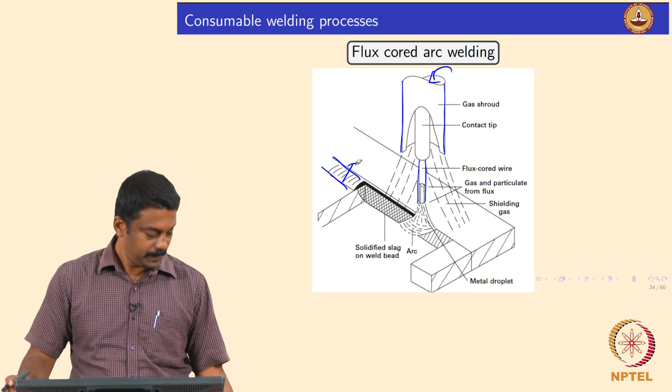So, this is the cross section of the electrode which you saw in last class as well. So, you have an outer sheath and then the flux is inside. Now it is almost compacted.

So, you can have a look at it. This is a 2.4 mm diameter FCAW, it will not come out even if you tap it, because it is already compacted with the binder.

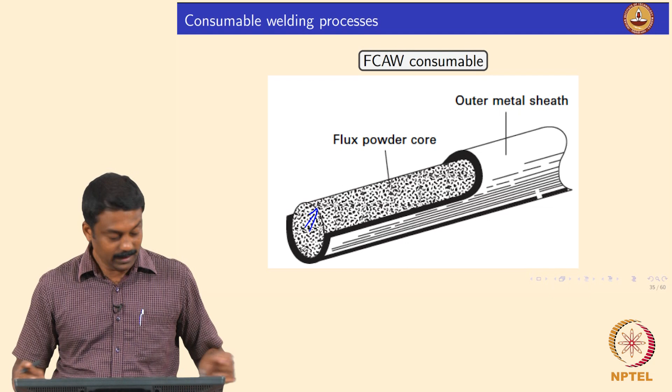So, all the compounds or the flux are added inside, and then the electrode is made from the flat strip, and then you add the flux powder, and then you close it. In most cases it is not really welded, it is just simple folding, right.

So, they just fold it and then they close the seam, and you can generate as much length as possible, and then generally we make it similar to what GMAW electrode filler. So, we will have spools of electrodes made with varying weights and lengths, and that can be fed into the power source. Yes, it is clear.

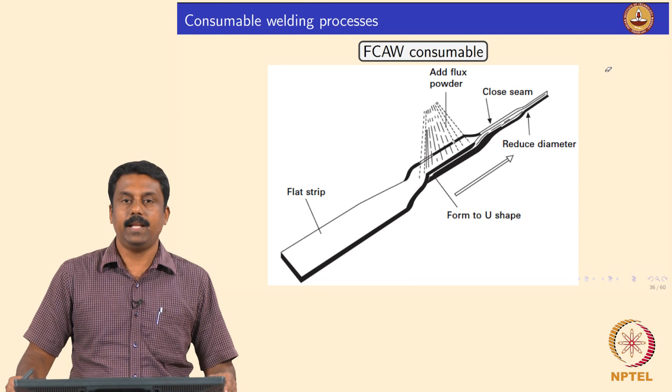Good. So, a typical cross section looks like this, so you can make it as a seamless tube, or you also have a butt seam, and this is the electrode I gave you, it is a butt seamed electrode, where you have a simple joint. Or you can also have a varying joggle seam on the complex section, so in this case you can also improve or increase the amount of alloy molten. In this case the cross section, or the length of the metal, is much lower than when you have such a geometry.

So, if you want to increase the liquid metal droplet, the contribution from the actual metal, you can also change the sheet geometry in such a way that in this case you melt more metal, and then you have a little amount of flux surrounding the metal sheet.

So, for these kinds of electrodes, the amount of flux which is there is not sufficient to produce enough shielding, because here the metal volume is much higher than the flux volume. So, such a geometry, complex section geometry, is used in conjunction with the shielding gas.

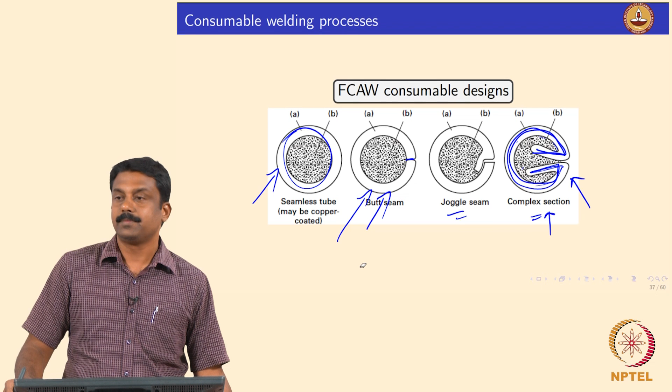So, the melting rate. In GMAW, what is melting rate? In GMAW, the melting rate of the consumable is alpha times I, beta L I square by A.

What is L here? Stick out length, exactly. So you have an electrode tube, contact tube, and then the electrode coming in forms an arc, isn't it? This is stick out length L. So this distance, what is this distance? This is contact tip, and this is workpiece, isn't it?

Then what is this distance? This is contact tip to workpiece distance. Okay, it is very simple. So CTWD, that is what we define all the time. CTWD minus arc length is your stick out length. So CTWD defines the distance between the contact tip to the workpiece, and that is a very important parameter, because that would determine the stick out length and the arc length.

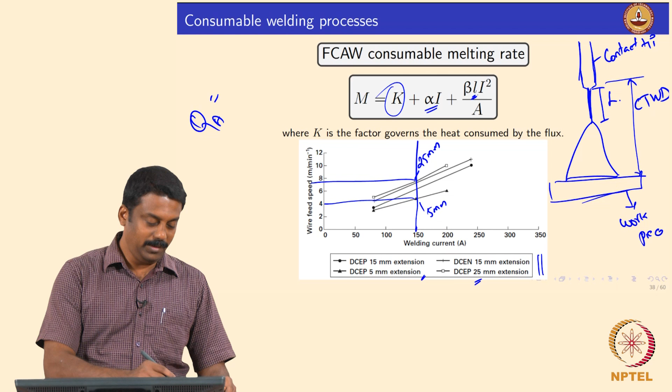If the current is the same, your question is why does melting rate increase? Look at this equation. If stick-out length changes, melting rate increases, because the more the length, the more Joule heating. So you looked at Joule heating, right? What is the Joule heating formula? I square R, that is rho L by pi R square, I square. That is how we derive the melting rate equation by heat balance, isn't it?

So what is L here? L is this stick out length. So more the stick out length, more Joule heating, then more heat is there for melting, right. So it is again the heat balance what we derived.

So by just changing the stick out length, you see that already the melting rate can be doubled. So that is why, by all other parameters in this equation being fixed, we take it as a constant, because the process efficiency depends on the shielding gas, the characteristic of the ionization, the reactions, the heat generation which is happening.

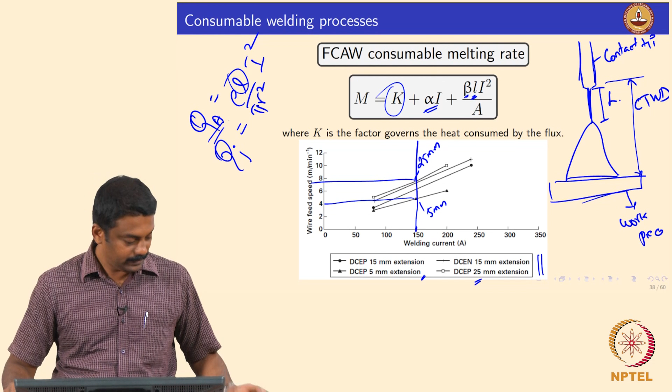The main reaction for shielding gas generation in flux-coated or FCAW electrodes is calcium carbonate burning into calcium oxide and CO2. The calcium oxide forms a slag and CO2 becomes the shielding gas. In cellulosic material, the fluxes generate carbon monoxide, carbon dioxide, and also hydrogen.

Rutile material contains titanium oxide, which also generates hydrogen. In rutile-based fluxes, the main shielding gas is hydrogen, because titanium oxide can effectively reduce water into hydrogen and oxygen.

That is why titanium oxide is nowadays commonly explored by nano researchers to generate hydrogen through photocatalysis. Nano titanium oxide rutile is used as a catalyst to decompose water into hydrogen and oxygen, because titanium oxide has a photocatalytic effect.

When a water droplet comes to the surface of titanium oxide, it promotes the disintegration of water into hydrogen and oxygen. Titanium oxide is explored extensively nowadays - people generate nano titanium oxide and use it as a photocatalytic agent to generate hydrogen.

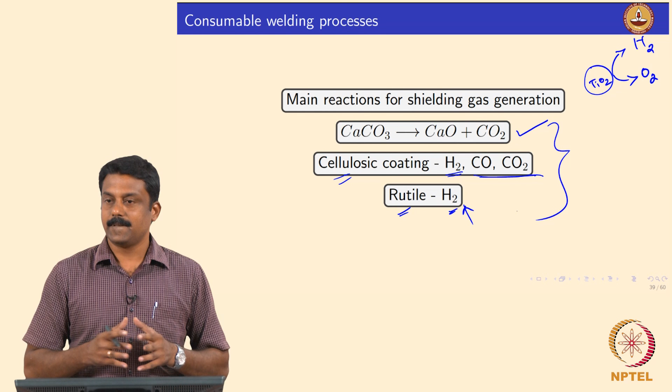Good, so we move on. I just put four important roles of fluxes in SMAW and FCAW. The main important function is obviously that it should generate shielding gas, either carbon monoxide, carbon dioxide, or hydrogen.

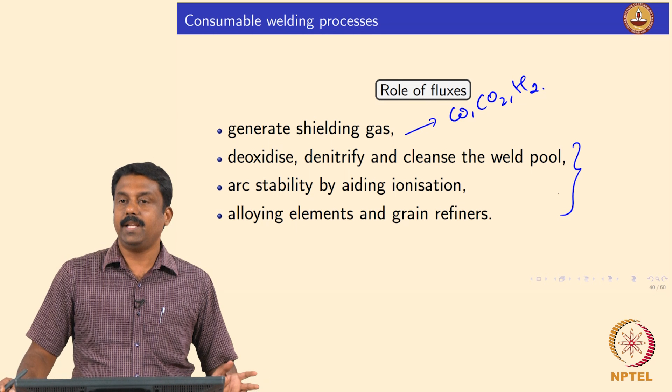So that is the main function, to generate shielding gas. Apart from this, there are some secondary functions these fluxes do. They act as a deoxidizer for the weld pool, and they also denitrify and clean the weld pool. You can also have dephosphorization and desulfurization done by adding elements which promote deoxidization, denitrization, desulfurization or dephosphorization, to clean the weld pool.

Then, to improve the arc stability, because we know that the oxides have very low ionization potential, they also promote ionization. If you improve the ionization, arc stability increases. Ultimately the basic definition of arc is sustained discharge, so discharge is sustained to have a stable arc. If you promote ionization by adding oxides, arc stability increases automatically.

Of course, these fluxes can also be added to change the alloy composition of the element. So you can also add precipitation-inducing elements like ferro-niobium, ferro-titanium in steels, and they can also act as grain refining elements in the fluxes. So these are all the secondary functions, but the primary function in these processes is to generate shielding gas.

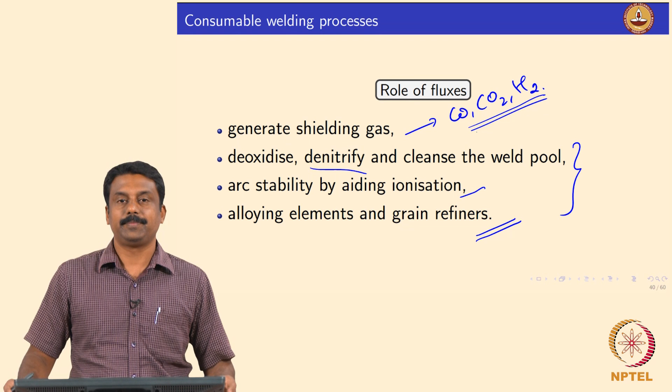So what are the types of commonly used flux core arc welding electrodes? For plain carbon steels, we have rutile. If you use rutile, obviously if you do not have enough flux to generate shielding gas, you need external shielding, so rutile electrodes are gas shielded.

That means you need to have an argon cylinder if you want to use argon. So then it becomes argon plus hydrogen shielding, because rutile can generate hydrogen, and argon can come from the bottle, and the shielding would be from argon plus hydrogen. The basic gas shielding will be argon plus CO2.

And in basic, in most cases it's argon plus CO2, because in most cases you will have calcium carbonate fluxes. So you will have argon as external shielding and then CO2 generated from the burning of the flux.

In self-shielded electrodes, which I circulated, this is a self-shielded electrode, where you have a maximum amount of flux generated, maximum amount of gas generated by the decomposition of the flux. So we do not use any extra shielding for the electrode I just sent around, because this electrode is self-shielded, where the flux inside the core of this electrode burns and generates carbon dioxide.

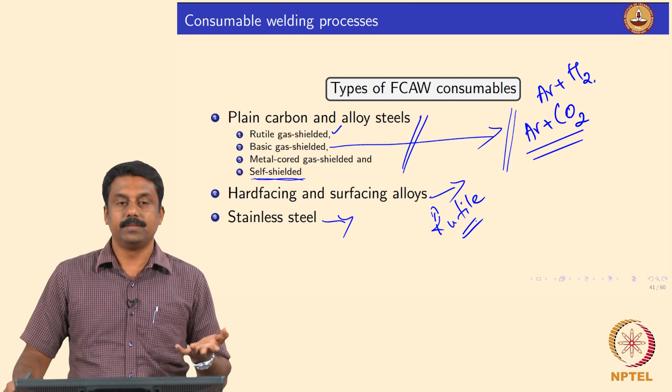The electrodes used for hardfacing and stainless steel are mostly rutile based electrodes. Rutile based electrodes are commonly used for hardfacing and surfacing alloys because of improved process stability, and you can also use hydrogen as a shielding for stainless steel. The austenitic stainless steels do not have an embrittlement problem.

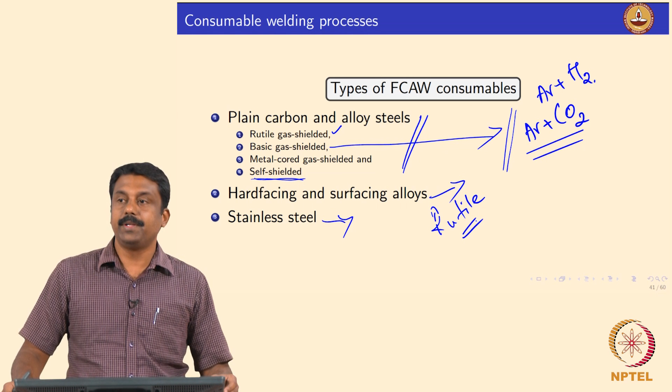Good, any questions so far? Then we will move on to the metal transfer in this process, in this case.

In most of the rutile based electrodes, the metal transfer is the same as GMAW, because rutile reduces surface tension. So the droplet can be transferred with smaller diameter, and you also have a free flight transfer with a rutile based electrode. The droplet diameter can be much smaller because titanium oxide favorably changes the surface tension, improving the transfer characteristics.

The video I showed you was not a rutile electrode, that was a self-shielded electrode, where the droplet is not transferred at all; it stays intact for a longer time. By just adding some titanium oxide, we can promote the droplet transfer much more effectively by changing the surface tension. Is it clear?

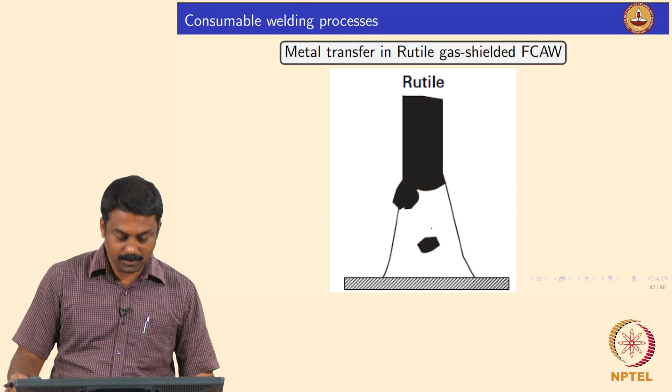In the basic steel electrode, that is what I showed you. In most cases, the droplet would be attached, and then you would start striking an arc between the droplet, and you still have a finger developed by the molten fluxes attached to the electrode, which is commonly seen.

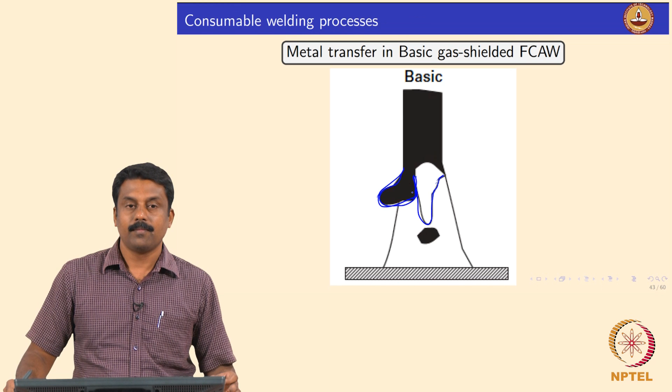So you will have a repelled transfer, and then a finger pattern develops at the electrode tip by the molten fluxes. By increasing the surface tension, the molten droplet would be sticking to the electrode tip, forming a repelled globular transfer, yes, in a basic gas shielded flux cored arc welding.

Again, with self-shielding, it increases even further, like I showed you in the second video. The predominant transfer mechanism is a repelled globular transfer.

If you want to see the video again, you see that. So this electrode becomes... you see that repelled mode of transfer. This is the tip of the electrode, and this is the contact tip, and this is the stick-out length.

So, you see that upon increasing in size, you also establish and short circuiting and dip transfer. The moment dip transfer happens, because of increasing Lorentz force, this would explode.

Yeah, so now it is exploding. You see this? You see the explosion? Because of the explosion, it is also still pushed up, and the surface tension is so strong, it keeps the droplet attached to the electrode surface.

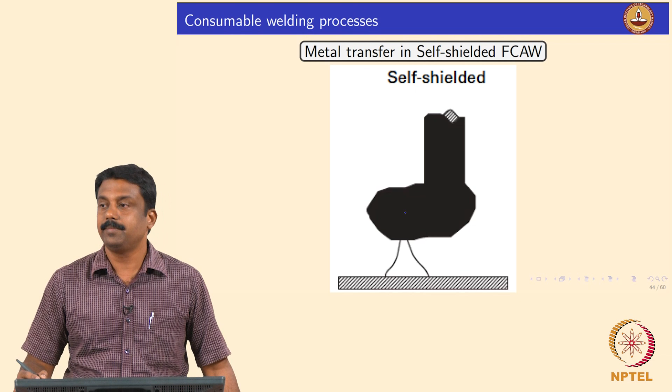Yes, it's clear. Then what needs to be done? You can't add titanium oxide to this, so then you will also generate hydrogen, right? So we can think about adding some other fluxes which can favorably change the surface tension. For example, fluorides or silicates that can be added.

But then if you add fluorides and silicates, there are other complications. So now you have to play around with the flux chemistry. You can think about adding titanium oxide, but the hydrogen should be pinned by some other elements, like boron. So we can also form boron hydrides, and it can be removed as slag.

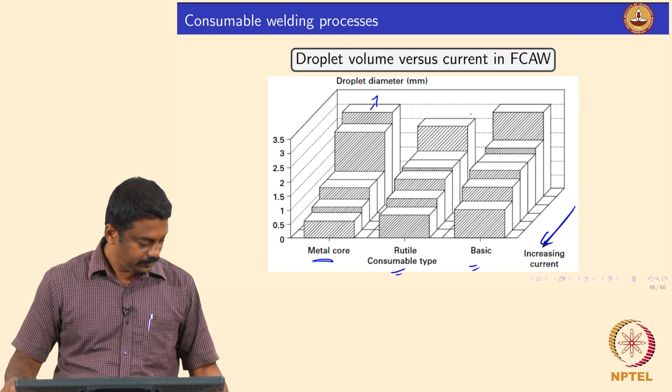So what are the limitations of FCAW? The cost of the consumables, as I said in the last class, is much more expensive than the wire. Although the actual investment you put up in a factory to make these electrodes is reasonably small, the work you do on flux compositions to achieve the composition and generate the electrodes with the flux coating or flux cored arc weld electrodes makes the consumable expensive compared to GMAW.

The other important disadvantage is fume generation by the burning of the fluxes and ferroalloys in the flux, and consistency of the consumables is also problematic, because achieving a uniform flux coating is very tricky. These are powder based, so you have to mix with binder and then deposit, and you need to achieve homogeneous mixing of the ingredients in the fluxes. So you always have some difference in consistency across the length of the electrodes.

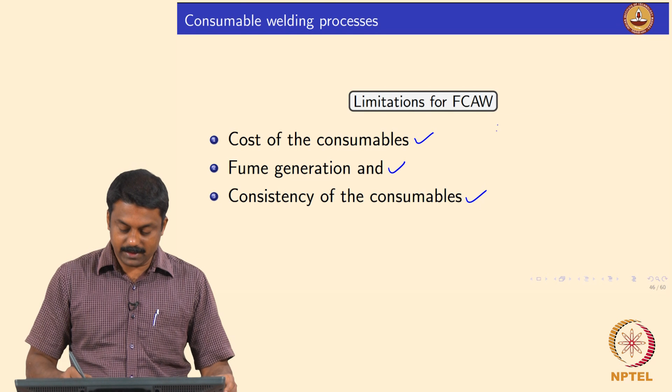So these are some disadvantages, but this can be overcome by the advantages of the process. For example, if you look at the overall cost comparison between GMAW, which is gas metal arc welding, and FCAW, flux cored arc welding, the consumable is always 3 times higher.

in flux core arc welding or SMAW. But you overcome that by other factors. For example, you do not need shielding gas if you use self-shielded electrodes, or even if you use a rutile based electrode, the shielding gas necessary is much less than what you need for GMAW. You also get improved efficiency from the process, needing less power, and the shielding gas you use also ionizes at much lower temperatures.

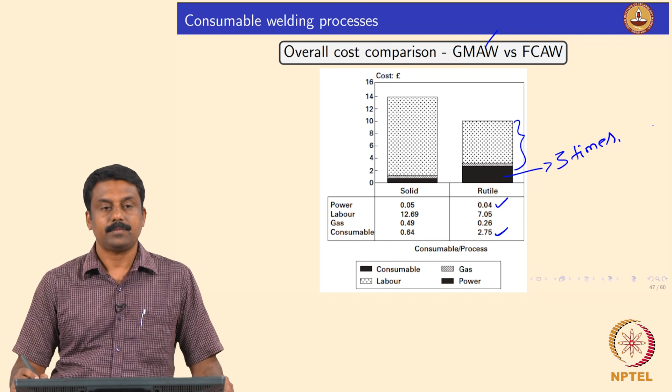And of course, GMAW is more laborious, and the consumable is almost 3 times expensive. So if you add all these costs together, FCAW and MMAW are much cheaper than GMAW. Is it clear? Okay, good. Any questions so far? Otherwise, we can move on to the next chapter.